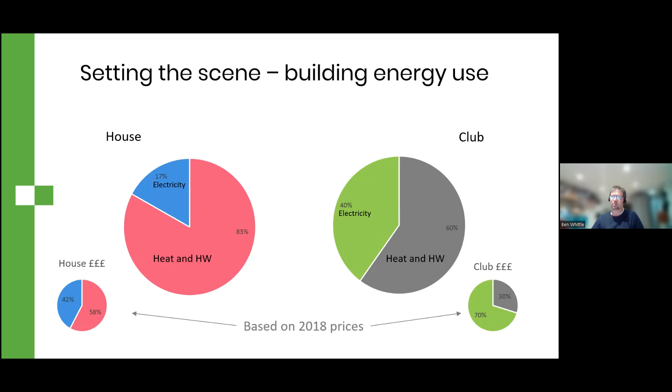And obviously the same thing on the right-hand side again. The big circle is the split of energy use, electricity and heat and hot water. The vast majority of it is still heat and hot water, but the electricity usage is much higher for various reasons. So the figures and graphs that we see on the next few slides will be all about avoidable costs. So I haven't actually put the standing charges and so on into these pricing statistics. They're just based on what you can potentially avoid.

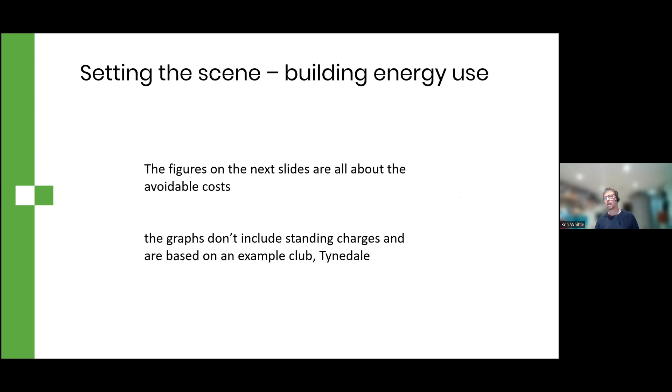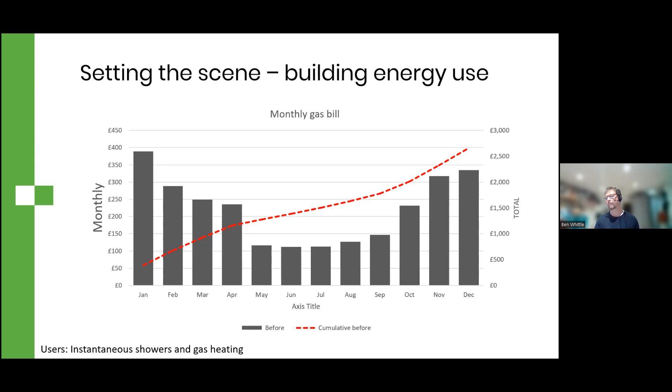This is the gas bill for Tynedale over the last year. You can see, maybe unsurprisingly, that it changes quite dramatically over the course of the year. Very little in the summer period, quite a lot in the winter period. And the red dotted line is telling you cumulatively what the bill adds up to over the course of the year. And by the time we get to the end of the year in December, the bills have totaled up to around about 2,750, something like that. Again, this is avoiding standing charges.

If we look at the electricity bills, we've got a very different picture here, and you can see I've got lots of different colored bars going on there. That's because there's 4 different connection points at the club, so 4 different sets of bills coming in. You can see the key at the bottom there. So there's a weekday rate, a weeknight rate, another meter somewhere else with single rate, and then the floodlights are also supplied by their own meter as well. So all of those added up give you that shape.

The rather unusual blip that you get in the middle of the year there at June is a result of external events where the premises have been hired out to other people, I believe. So that's what's causing that spike. Otherwise, we'd expect it to be the same as May and July normally. Sorry, I should just go back and explain. The cumulative bill there at the end is about £9,500.

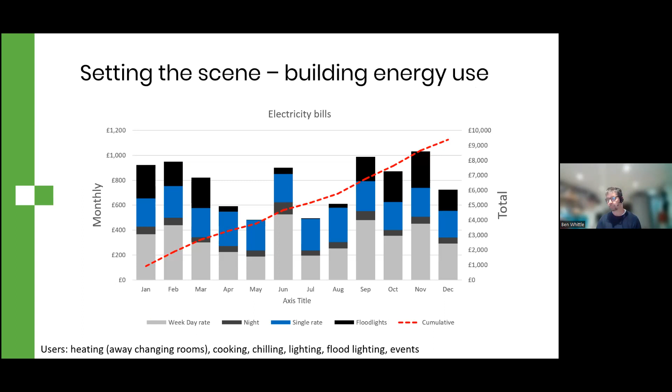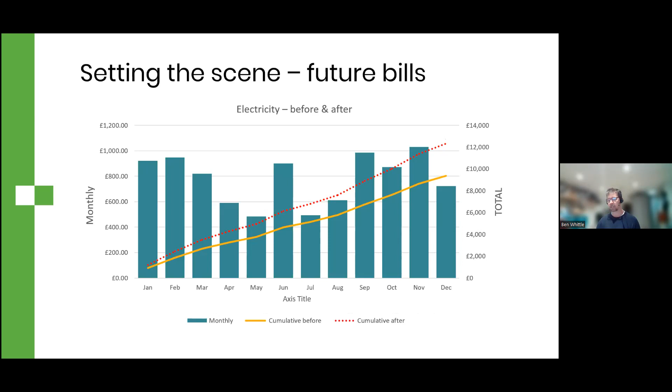We do the same thing again with the electricity use. I've just summed all of those different meters together, so it's a bit less confusing to look at. The cumulative bill before was, like I said, just about £9,000. Going into the new regime, it's much more likely to be closer to £12,500. And don't forget, there's the standing charges added on top of that as well. So what's happened from before to afterwards? We've seen gas increases go up by 248% and the electricity rate go up by about 140%. Pretty significant changes.

So what are your options? Well, you've got energy efficiency, electricity generation from solar panels, heat bill reductions that might not come from energy efficiency. So you could be thinking about putting in heat pumps, and then you could go further towards even better savings by combining solar panels and heat pumps together at the same time. But that might not be suitable for everybody, and we'll talk about that in a little bit more detail.

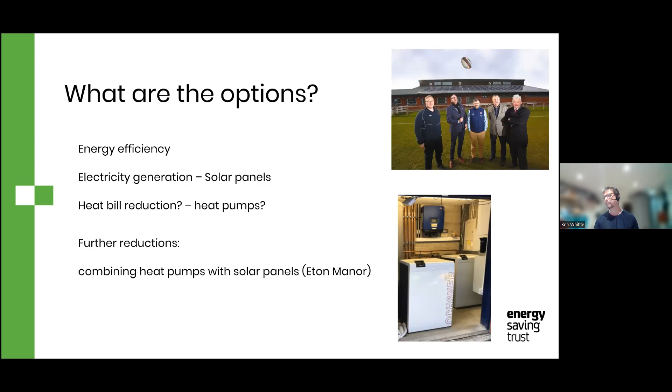So we're going to go into another poll now. So back over to Alex. Do you know whether the support mechanism applies to you? And I've launched that poll now, so you should see that and select one of them. Yes, no, or are you not sure about that? And I can see that they're coming in now.

For any reason, I say again, if you cannot see it, please just put your answer into the chat function if you've lost it for some reason. So do you know whether the support mechanism applies to you? Yes, no, or not sure. Slowing up now, so I'm just going to give it a final bit of time before I finish this poll. So last little chance to get in. I'm going to end that poll now. I'll share those results with you.

And a lot of you on the webinar tonight are not sure, with 56%, with some no and some yeses in there, Ben, as well, to add. Back over to you, Ben. Great, thank you.

So first of all, we're going to start talking about energy efficiency for heat. One of the problems we have with heat is it's very difficult to measure it. You can go and have a look at your gas meter, but that doesn't give you a good idea about how heat is being used or lost inside the building itself. When I had a look at the bills that I got sent through, I've had to do a little bit of guesswork to get to some of where I needed to.

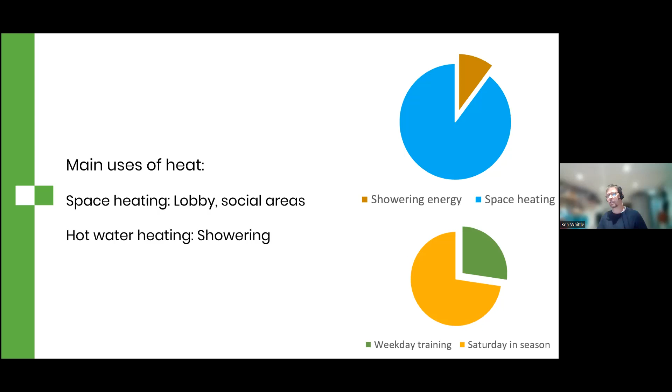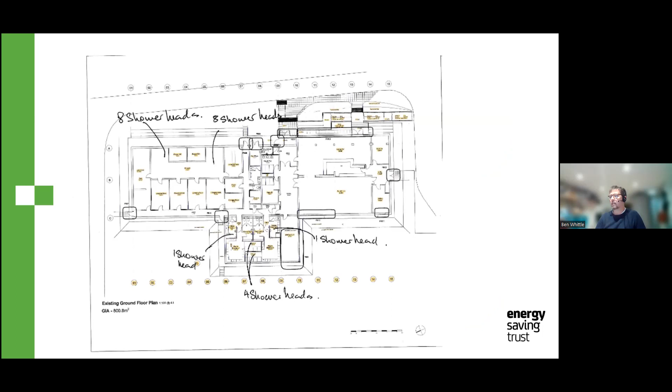This is a floor plan of the Tyndale Club. You can see the layout of all of the shower heads over here and the lobby area. So I've used all of this in my modeling to try and work out what we should be doing about this. When you're trying to avoid wasting heat, the most important thing nearly always is to just make sure that something is not being heated when it shouldn't be. And when you are heating it, you're only heating it to the right temperature.

So here we're thinking about timers to make sure that things aren't staying on when they shouldn't be. We could also talk about building insulation and pipe insulation and cylinder insulation, and then also about reducing temperatures on thermostats, hot water storage, and boiler temperatures. Now, in Tyndale's case, they don't have any hot water storage per se. All of the showering energy is coming through instantaneous combi boilers to provide that heat. So there's no stored hot water.

That's probably quite a good move for a lot of rugby clubs because you're not there in the middle of the week a lot of the time using hot water, and it also avoids problems around keeping the water hot to reduce the risk of Legionella. So I understand why a lot of clubs would be using instantaneous boilers. That's not necessarily a bad idea, but there is also the issue of the boiler itself for heating the common areas, the lobby and the social lounges.

I'm sure you have all heard that reducing the temperature of a building by 1 degree is enough to save 10% off the energy bill for heating. So that's a really good one to have stuck in your head all the time. It's probably one of the most important things you could possibly do to reduce your gas bill, reduce the temperature in the clubhouse if you can afford to do that.

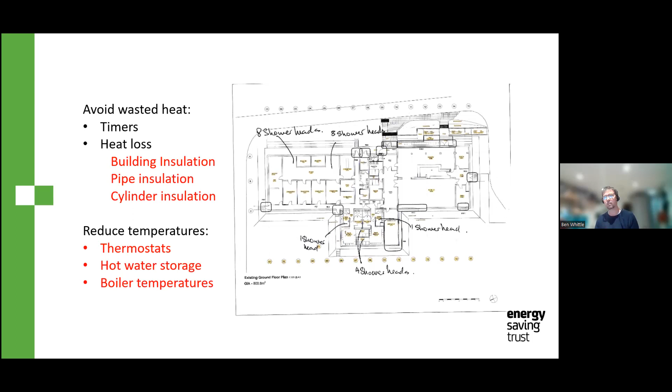I know there is a lobby here. Maybe you might want to think about actually not heating the lobby if it's not strictly necessary. But there are so many different clubs out there with so many different physical arrangements. That's not a blanket statement for all clubs. I'm just asking you to think about the question.

So when we think about timers, it's always a good idea to automate things, just like it's a good idea to have a light sensor on an outdoor light to make sure it doesn't turn on when it's light outside. You can do similar sorts of things with your heating controls. Theoretically, depending on how well organized you guys are and how active your facilities management is, you could completely automate all of your heating controls and actually do your control of the heating away from the building.

So not only would you control time programs, but you could theoretically turn it on and off when there was nobody actually at the building and check whether the heating was on or off if you have the right heating controls in place that are connected to the internet.

When it comes to insulation of buildings and pipework, building insulation is relatively expensive. Now, obviously, your occupation patterns in clubs are that you're using it mostly through the winter in season, but you might find that insulating the whole building would be a very, very expensive business, and it doesn't necessarily offer really good value for money in quite a short period. That's completely the opposite case for pipe insulation. Pipe insulation is really cheap and quick to do, and it will pay for itself in less than a couple of years most of the time.

So when you're surveying your heating systems, you really want to be making sure that your pipes are insulated when they pass through cold areas. If you've got an uninsulated pipe in an area that you're keeping warm anyway, you might argue it's not quite so important because the heat that comes off the pipe would just be heating the space anyway. But I imagine there are a fair number of club buildings that have got a boiler that's quite a long way off from the social and lobby areas, and it's passing through cold changing rooms and utility areas and so on. Those are the bits you've really got to concentrate on and make sure those pipes are well insulated.

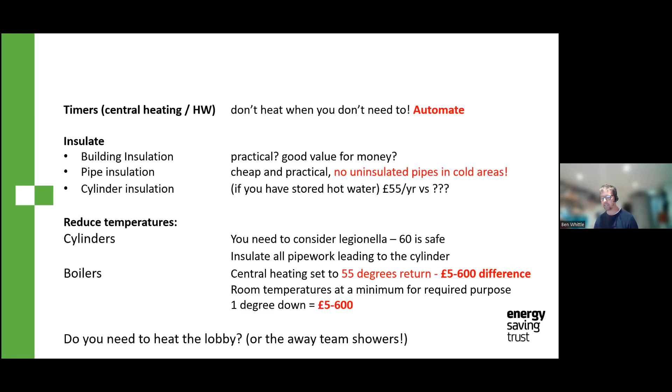In Tyndale's bills, that could have been the difference between £500 and £600 saving, having it at 19 degrees versus 18 degrees. One other thing you might want to consider, controversial: do you actually need to heat the away team showers? I'll leave that one for you to decide.

So next, we're going to move on to energy efficiency with electricity. And one of the great things about electricity is you can measure it very easily, so it's much easier to track down problem areas. When I looked at the bills at Tyndale, I could see the main uses of electricity were floodlighting, like we showed in the graphs before. And then the rest of it was mainly around chillers, fridges, freezers, cooking, and also that big lump in June time when you were hiring out facilities for other events.

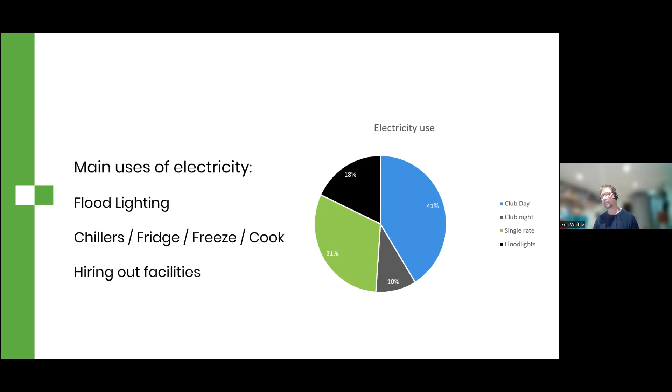I would say that there's a risk that if you're not charging much for hiring out your facilities and they're using loads and loads of electricity for whatever it is they're doing, you're not making anywhere near as much money out of that event as you might think. So it might be worthwhile just tracking how much electricity is being used when you are renting out your premises to make sure that you're covering your costs as well as you could do.

So when it comes to avoiding wasted electricity, again, we've seen already how much of the energy use in your buildings is actually associated with heat, and electricity does provide heat sometimes. So I think I'm right in saying in Tyndale, the away changing rooms are heated electrically, even though the common areas are heated by the gas boiler. Electricity per unit is 21 pence. Gas per unit is at the moment 7.5 pence under that cap that we spoke about before.

So you might even want to think about moving the away changing rooms heating over to gas in that situation, because it's a third of the price of electricity. Whether that's practical or not with the boiler arrangements you've got there, I don't know. I'd need to go and look at the building. But just remember that electric heat is expensive and gas heat is relatively cheap, as long as we're not talking about heat pumps. But I'll go into that in a little bit more detail later.

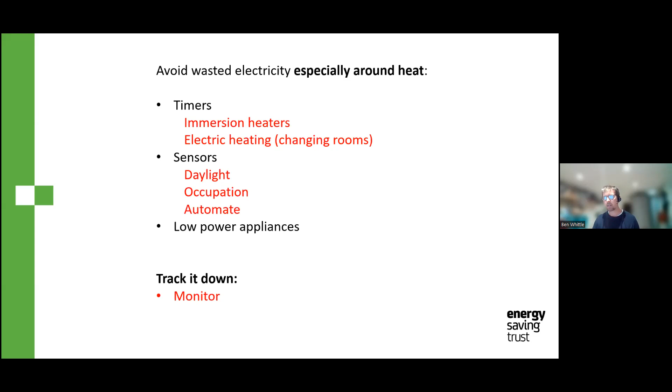For your lighting, make sure it's only operating at nighttime. You can get occupation sensors that make sure the lighting doesn't stay on when there's nobody moving around the building. Automate everything that you can to make sure that lights aren't being used when they don't need to be. Low power appliances as well. If you're replacing kit in the clubhouse, always try and find those appliances which have got a good energy rating on them.

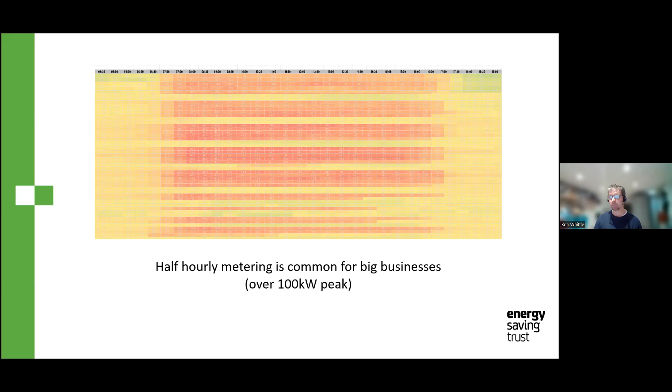So many clubs won't be in a situation where they would normally have half-hourly metering, but if you don't have access to half-hourly metering, what you can do is buy other equipment that does exactly the same thing. And I would argue that sometimes this information, which is in far, far more detail than you get through half-hourly metering, would be potentially quite a lot more useful to you, especially if you're trying to track down energy use that you're a bit confused about.

So in this case, this is a platform from a company called Owl Energy Monitors, and it's giving you that information every 2 minutes instead of every half hour. And you can see individual spikes there of individual appliances turning on. So you can get quite a lot more information out of some kind of system like that. They don't need a professional to install them, though. If you're confused about electricity, obviously don't do anything that you're not comfortable with.

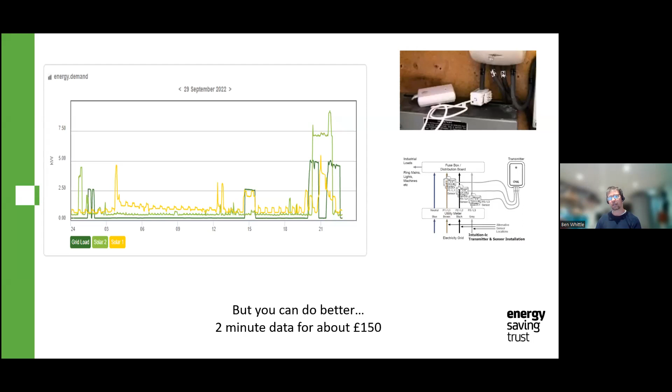They are designed to be consumer devices. And once you've got the sensors set up on the electricity meter, all it involves then is just setting up an account online and connecting that device through a small hub to the internet, so that you can access all of this information online and then download it into spreadsheets and have a better chance of trying to track down what's going on.

Some of the bigger buildings, you might find there's multiple distribution boards. So you might start off looking at energy use at the main point of incoming. And then once you're trying to track down faults, if you think you've got problem pieces of equipment that are using too much energy, you can move them across to each individual distribution board and then really see what's going on, eliminate things from your inquiries and track down those problem loads.

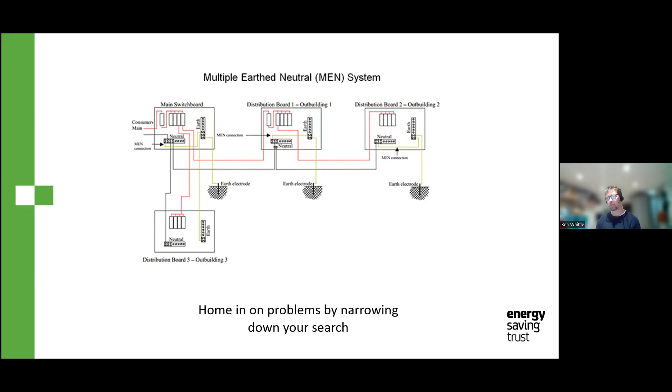So many of you may have thought already about trying to put solar systems onto your properties to try and cut down on energy use. So I'm just going to talk a little bit here about the practicalities of doing that and what the impact on your bills may or may not be in that situation. Before we go into that, we're going to go into another poll. Are you already considering solar or heat pumps for your buildings?

Yeah, thank you, Ben. And the poll is with you now. And on this one, it's important to remember you can answer more than one. Okay, so you can answer as many on here as you would like to. So it makes it a bit more difficult to know when you're finished. However, you answer more than one. Like I say, any problems at all, put your answer in the chat. We'd love to hear from you.

So I can see what's coming in now. So let us know, what are you considering on solar and heat pumps? Is it solar PV panels, heat pumps? Is it solar water heating? Or is this all new to you and it will be something for the future? So I can see that's slowing up now, and I'm just going to end that poll and then share those results with you.

So quite a lot are considering a lot out there, particularly solar PV panels with 68%, but yeah, heat pumps, less so solar water heating, and some are not sure there. So back over to you, Ben. Thanks very much. Thanks, Alex. Okay, well, hopefully you'll find this next bit useful.

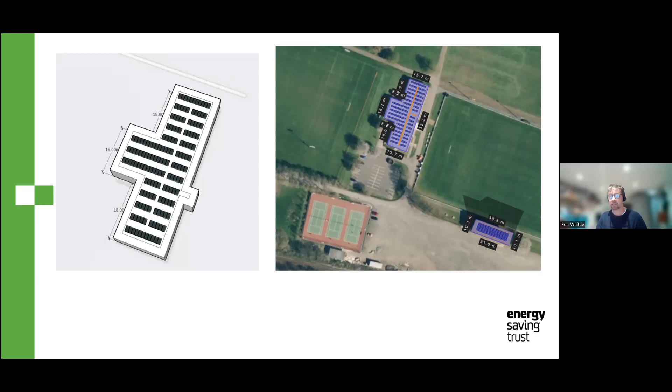There is potentially a solution, though asbestos is going to be an expensive problem to solve when you start trying to get rid of asbestos roofing sheets, which you will inevitably do if you start trying to put solar panels on top of those. It's just much simpler to replace them than to work with them.

Right, the key point I want to get across here is that the situation we are in now with solar panels and where we were 10 years ago is completely different. When there was the incentive scheme called the feed-in tariff, the approach to sizing solar systems was completely different. In that situation, you got money whether you used electricity or not, and then you got an extra small amount for what you exported, and then you also got the benefit of what you used inside the clubhouse.

We don't have that scheme anymore. The only benefits that you get now are what you use yourself and what you export. And the difference between those prices is quite significant. So you can see here on the table, under that support scheme, electricity is 21 pence a kilowatt hour, or exported energy that you sell to the grid is about 5.5 pence a kilowatt hour. Pretty big difference there, 4 times as much.

So the emphasis now is much more on sizing the solar system to make sure that you use most of what it produces, and that's the way to get the best value for money out of a solar system. So on the left hand side, I put in some real line in the sand guess at what the installation cost for different system sizes would be.

Now, I used to work as a solar installer, so I'm pretty confident that these are realistic prices. And we've got, starting here on the top, 1 kilowatt. Nobody installs a 1 kilowatt system. That's about 3 panels nowadays. But it's just there to give you an idea of what's going on here.

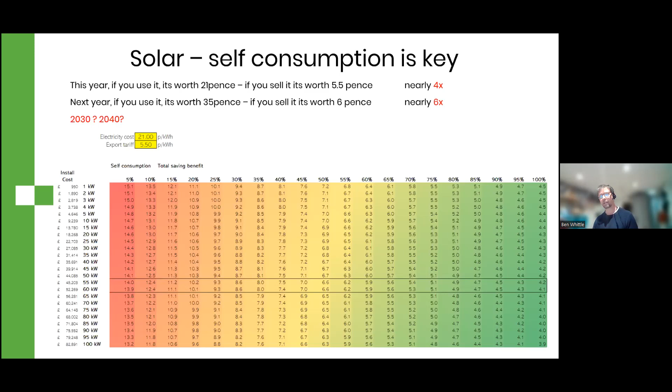So your aim as a club would be to put a solar system on the roof which maximizes the amount of energy that you use yourself. You don't put in a really big system. You've got to size it correctly for the needs that you've got in your clubhouse. And again, going back to that energy monitoring that I showed you earlier, if you're armed with that data showing you how much energy you're using in the building, and most importantly, what time of day you're using it, that is the route to making sure that you get a solar system that's the right size for you.

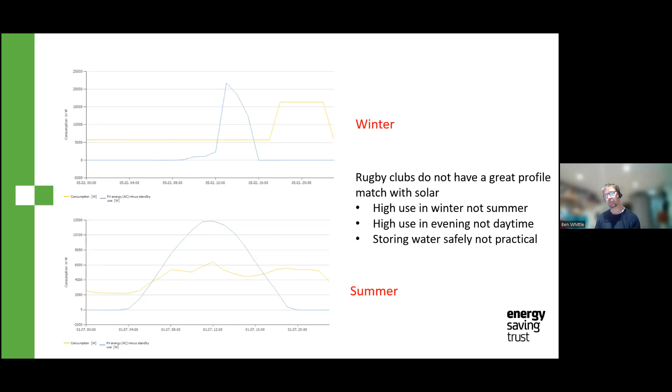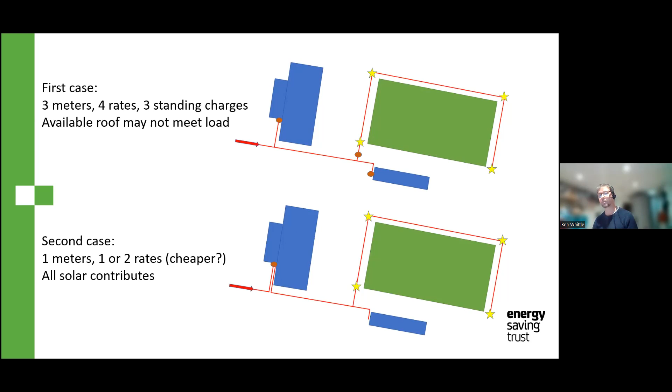When we look at the breakdown of charges, some of you might be interested to understand how much of the bill is electricity charge that you can reduce by not using it, and how much of it is standing charge and how much of it is climate change levy. The standing charge doesn't go away. We used to be looking at standing charges of about 20 pence a day a couple of years ago. I think you'll find quite normally now those standing charges are creeping up to sort of 50 pence a day.

That's unavoidable, but obviously you can avoid using normal electricity, and the climate change levy is linked to how much electricity you use. So when you reduce your main energy use, you're also reducing climate change levy as well. I also worked out that the standing charges, if we removed 2 of the meters and just consolidated it all back to a single meter, you'd probably be avoiding around about £600 of standing charges.

When we put a solar system in, we need to think a little bit about how the electricity arrives at your door. Some clubhouses will be big, some will be small, some will be on a domestic single-phase connection. Some of them might have much larger connections, which we call 3-phase connections, the same sort of thing that you'd find in a factory. The DNO, so if you're in the region that I'm in, that would be Western Power, are responsible for all the cables that make their way to your door.

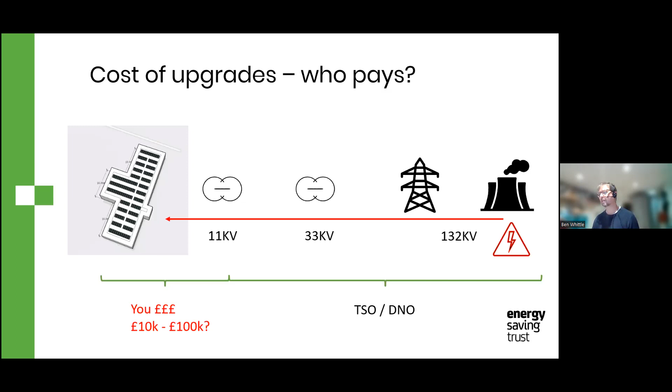I've just brought up that slide again, but we've got a little bit more information at the bottom here. So I modeled 2 different solar system sizes here, and in one case we had 28% self-consumption in the circle at the top there, and then in the other situation, when I'd reduced the solar system size, we got that consumption up to 55% self-consumption.

When I say self-consumption, I'm talking about the solar energy coming off the solar system and into your building and being used by you, saving you 21 pence per kilowatt hour. So if you remember the graph that I showed you earlier, that could be the difference between payback in 4 years or 8 years. So it's really important you get this stuff right.

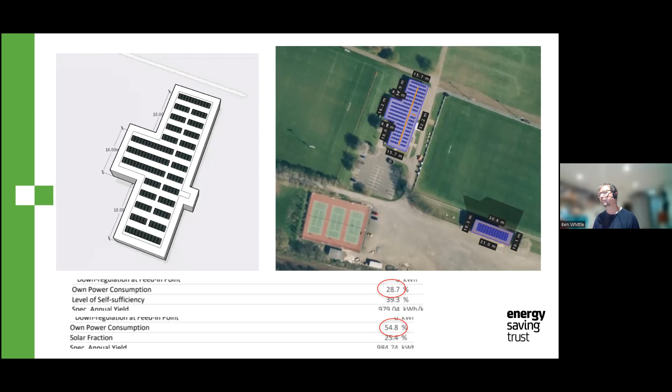Another thing you guys may be considering is moving over to heat pumps. Now, when it comes to the hydraulic designs and services provided in the club, there's going to be so much variation that, again, all I can say is I'm talking to you about what might be possible in some cases. It's not necessarily going to apply in all cases.

A lot of people get very confused about heat pumps, so I'm just going to go through a couple of basic technical terms. One thing people will talk about frequently is the coefficient of performance. You can think of that as being a bit like the MPG test for a car. It's the efficiency of the car at a certain speed. Another phrase that gets used almost interchangeably with coefficient of performance, or COP, is SPF, which is seasonal performance factor.

And it's kind of the same as a COP, but instead of it being at one time in the year, or on one day, or at one speed, if you like, in the car, it's the performance of the heat pump over the whole year. So it's a bit like the urban cycle of a car performing in different situations.

So when we talk about heat pumps, a very, very standard way to think about it is that for every unit of electricity that you put into the heat pump, you get 3 units of heat out. But that's not always true in all situations, and it's especially not true in a rugby club. So I'm just going to explain that a little bit better.

But maybe an easy way to think about this right now is that if electricity is 33 pence a kilowatt hour and gas is 11 pence a kilowatt hour, and if you put a unit of electricity into a heat pump and you get 3 units of heat out, that means that in this situation, 33 pence and 11 pence, they're going to run at the same cost.

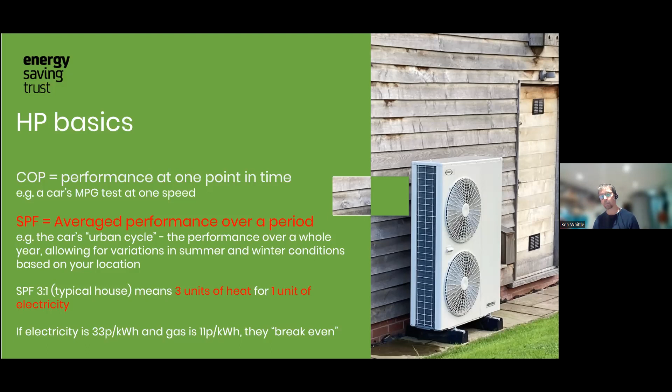I've assumed that any gas boiler would operate at around about 84% efficiency. Although many people might think that boilers operate at 90, 92% efficiency, we know from the real world that mostly boilers operate a bit less than that, and 84% is pretty much the average efficiency for a boiler.

It's slightly different for houses. It's still basically the same kind of picture, but because the unit rates are slightly different, and proportionally speaking, electricity is slightly more expensive under the domestic caps, a gas boiler would still be more expensive than a heat pump in most cases, but the difference between the two is a bit tighter.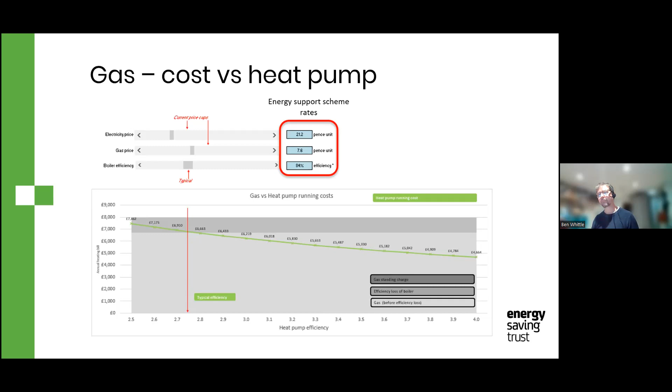So just to talk a little bit more around that ratio between water coming out of the heat pump at different temperatures. On the top little table here, I've got a high hot water use and low central heating use. And the seasonal performance factor, that ratio of electricity to heat, is 2.6. It's not that great because most of the heat coming out of it was produced at 60 degrees to heat your hot water cylinder, and much less of it was produced to do the central heating at lower temperatures.

Conversely, on the table below, we've got low hot water use, because maybe you don't have any stored hot water there, or there could be a number of reasons why that might be the case, but you've got a very high central heating use. The central heating use is much more efficient for the heat pump. You end up with a different seasonal performance factor, and then your bills end up lower as a result of that. So if you flip between those two different situations, running the heat pump in one situation would cost you 7,200. In the other situation, it would cost you 5,900.

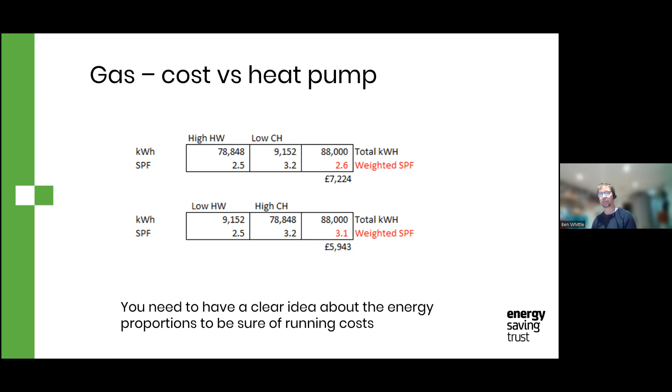So it's really important to think about this thing. Are we going to be using mainly hot water or mainly central heating from our heat pump to provide the services that it needs to in the clubhouse? Because that's going to dictate how efficiently the heat pump runs and therefore what your bills will be.

So this slide is talking a little bit more around self-consumption of solar electricity and heat pumps. On this slide here, we've got three situations. I actually modeled this for a house rather than a rugby club, but the basic principles apply. If you just put a solar system onto a house, you may well get around 27% of the solar energy going into the house and saving that person 21 pence a kilowatt hour for every unit that came from the solar system and was used in the house.

If you then add in a heat pump, your electricity bill goes up, your gas bill disappears, but you're also affecting the amount of solar energy that can be used. You've increased your electricity use. That gives you opportunity to potentially put in a larger solar system and use more of that electricity in your heat pump. So when I added into this house a heat pump rather than the gas boiler, the self-consumption of the solar energy went up to 55%. And then you're reducing the payback of your solar system. The solar system will pay for itself more quickly because it's doing more useful work.

And then in the third situation at the bottom, I imagine then putting a battery in as well. And in this particular case, though obviously it needs to be modeled to suit your circumstances, self-consumption of the solar energy went up to 95%, and the solar system was providing nearly 30% of the electricity being used in the building. So obviously you need to get somebody to come and look at this situation in detail, but that's the kind of dramatic scenario changes you can see based on adding in different technologies that work together to help you reduce your energy costs.

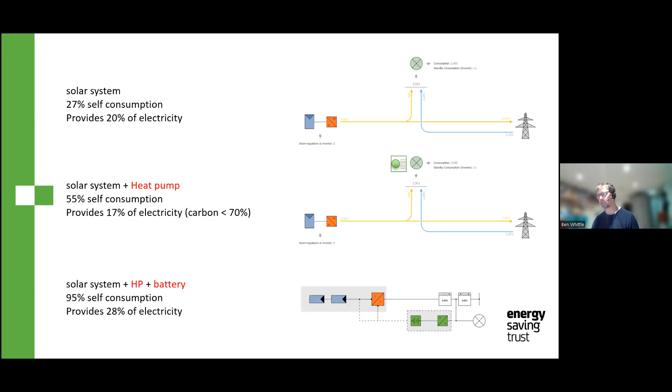Many of you may well know about Eton Manor. I had a chat with Martin about that before the presentation was being organised. If you don't know about Eton Manor, I'd encourage you to go and do some Googling on it to look at the case study there about what happened. They had a really, really intelligent system going on there. And unfortunately, you won't be able to replicate that because they were able to make even bigger savings by utilising the feed-in tariff and the renewable heat incentive for producing their heat.

But if we ignore the money side of things and the extra benefits they got from the subsidy system, basically what happened there was solar energy, the icon in the middle, went down to power the heat pump. When a heat pump runs, it produces heat. It also produces cold. There's two sides to a heat pump. It produces heat, and while it's producing heat, it's also expelling cold, if you like. That's not a very great way of describing it scientifically, but that's the way to think about it.

So in Eton Manor, what they did was they used the heat to provide hot water for the showering and heating in the clubhouse, and they took the waste cold and used it to chill a tank. So they had two tanks, one hot, one cold, and then from the chilling tank, they also used that to help cool the beer cellars. So this was like the holy grail of efficient energy use.

You had free solar energy coming in to the heat pump. They were getting paid for producing that solar energy by the feed-in tariff. They were getting paid for producing the heat that went into the hot water cylinders and the heating. And at the same time, they were using the free cold to help keep the cellars cold.

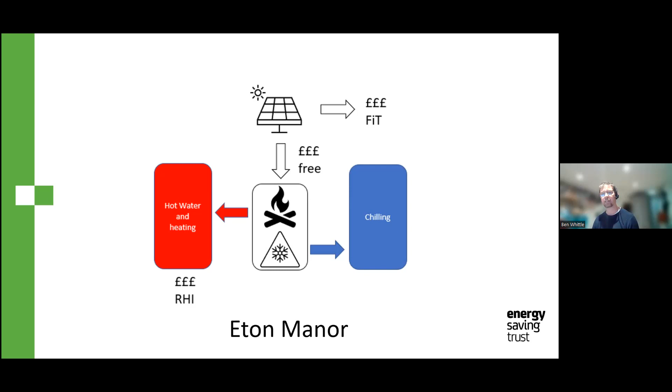Coincidentally, I actually worked on that installation at Eton Manor. I know the company that put it in, and I did some contracting work with them. And I was actually crawling around in the loft at Eton Manor, helping to run the pipes from one place to another.

Getting towards the end of the presentation now, I just thought I'd put this graph up here to show you the difference in cost and carbon between different heat sources as well. So on the left-hand side, we've got an electric boiler that would be running in the daytime. You can see there that the cost, the green bar, is really, really high. It's higher than anything else. Electric boilers are really expensive because they're running off electricity at 34 pence a kilowatt hour in this case.

If you move across to storage heaters, they're obviously running at nighttime on cheaper rate electricity. That drops the cost off compared to an electric boiler quite significantly, but it's still pretty expensive. If you then went to gas, that's almost as low as you can go in terms of heating costs at the moment. And then if you move across to a heat pump, you can see it's a little bit better than gas, but not much. If you want to be interested in the carbon emission savings instead, that yellow line is telling you everything you need to know.

When you put in electric storage heaters or electric boilers, they operate at roughly 100% efficiency, but it's relatively high carbon to produce that energy. Because the heat pump's only using 1 unit of electricity to produce 3 units of heat, it actually ends up being greener than gas quite significantly. So moving across from a gas boiler to a heat pump will reduce your carbon dioxide emissions by somewhere between 60 and 70%, depending on how efficiently you get that heat pump to run.

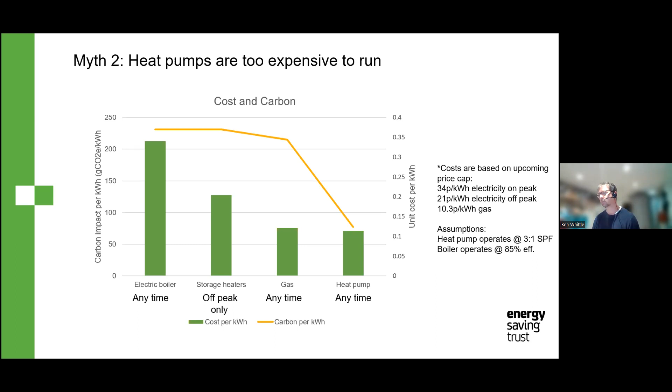So just to summarize then on energy efficiency, not using energy is the cheapest way to save money. Heat is often the biggest source of wasted energy. Remember, I spoke about insulating pipework in cold areas and so on, reducing temperatures. Automate and use thermostats and timers wherever you can, so you don't have to think about it. Anything that you can take out of the realm of the human and get a machine to do it for you instead, usually that's a much surefire way of making sure something gets turned off than relying on somebody else to do it.

Measure and monitor to track down waste wherever you can. If you're talking about measuring heat use, I think putting a heat meter onto the boiler to measure how much energy a boiler puts out is probably not that helpful, because it won't tell you where it's getting lost, where it's getting used, and it doesn't need to be. So quite often measuring and monitoring when it comes to heat is just about going around and doing visual inspections, checking timers and controls, making sure that you haven't got uninsulated pipe runs in cold areas.

You can also consider consolidating electricity supplies and meters if you've got that multiple meter situation going on that we saw at Tyndale. And then also I would ask the question, do your events actually cost you money rather than make money if you're renting your facilities out very cheaply, but the users are actually using stacks and stacks of electricity in that period?

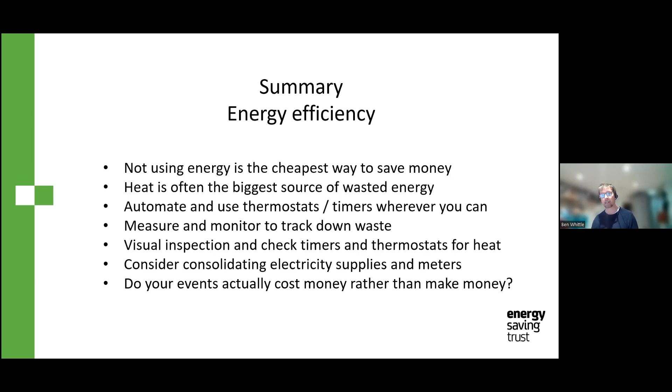And think about a journey as well. You may well not be able to do some or any of this stuff right now, but it's really important to think about the journey that you're going to go on from one place to another, moving from that, I've got 4 meters, 4 sets of standing charges, to consolidating everything to what makes the most sense, a solar system first or heat pump first.

I can't answer those questions. That's something that you're going to have to do by finding local contractors to come out and speak to you about this stuff, or maybe even employing an energy consultant to come and do the detailed work for you in a way that you can completely trust. But if you do this stuff right, there's absolutely a route forward to significantly reducing your bills and also reducing your carbon emissions as well.